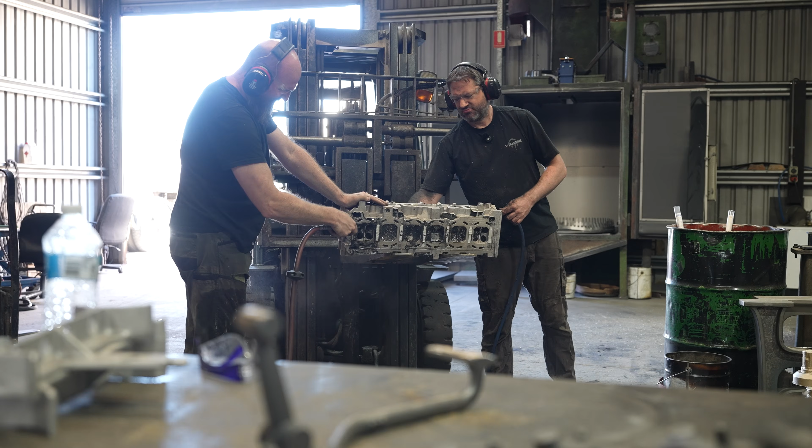All right, I'm standing here with Adam from Hasco Foundries, and we do all of our casting here in Australia. We're going to hear a little bit about the foundry, and then we're going to talk about our RB blocks and heads that all get done here. Thank you, Adam, and I'll let you tell us a little bit about why you do this insane, hot, sweltering business.

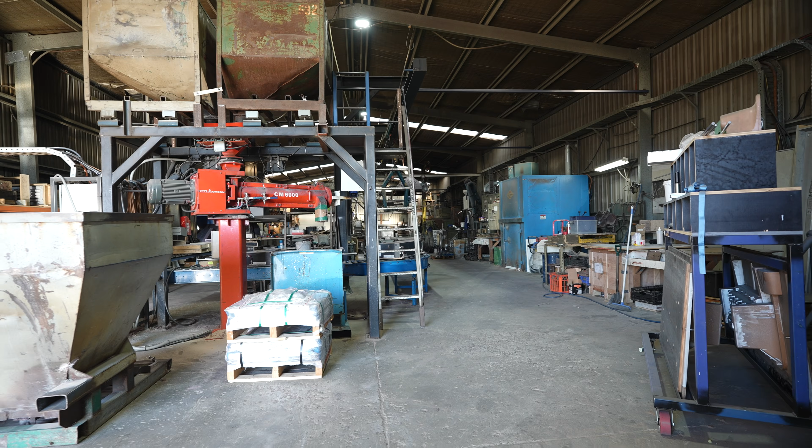We're Hasco Foundry. We're a small family business. We've been operating since the mid-80s. It started out as a small backyard operation before we migrated to this shed. We do ferrous casting and non-ferrous casting, so we can do both cast iron and aluminium castings for the performance auto industry, amongst various other industries that we serve as well.

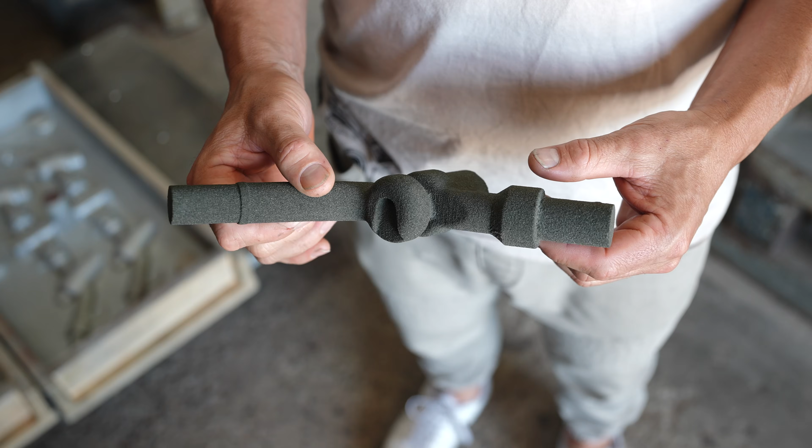I've seen some brasses and... Brasses and bronzes. We do rail, aero, transport, performance auto, mining, fuel nozzles. Fuel nozzles, yeah. Being a low volume jobbing foundry, we do pretty much whatever people bring in, we'll have a crack at. Because all the volume stuff's gone overseas, so you've got to do the small, niche, high quality stuff.

I've seen some 202 cylinder heads. Yes, yep, we do a 202 red motor cylinder head. The V12 LS we do as well.

And then we thought we'd ruin your life with an RB. No, we love it. What are you talking about?

So what we're going to do now is go through the whole process step by step, and I guess we start at the beginning. Yep, we'll start looking at 3D printed cores and go from there.

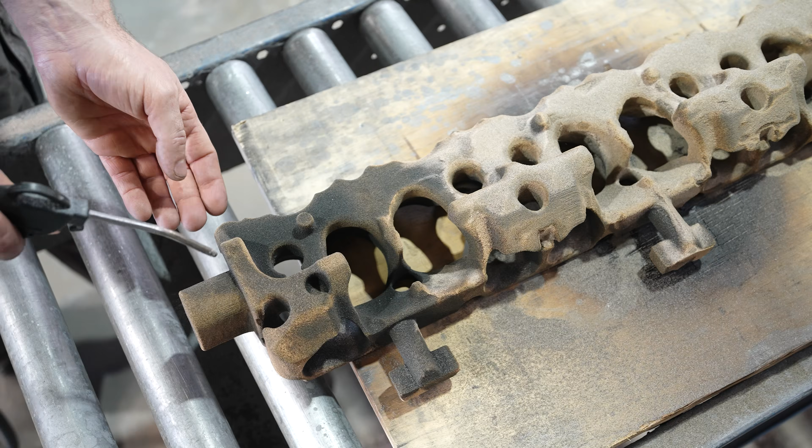So now after we've got our 3D printed core, this is all pre-production type stuff. We're not going to talk about full production stuff because we've got a lot of IP, and we're also not going to show you what our core looks like because it's very tricky, technical, and we don't want to give away secrets. But we do have the 202 one that we've just been able to video. Gives you an idea of what the middle looks like.

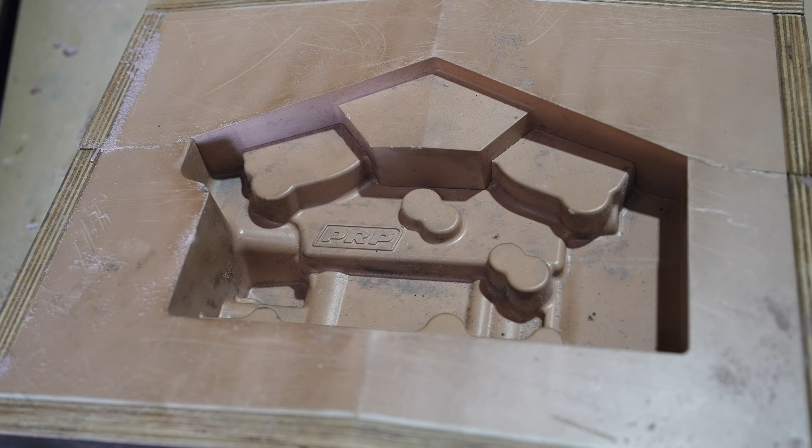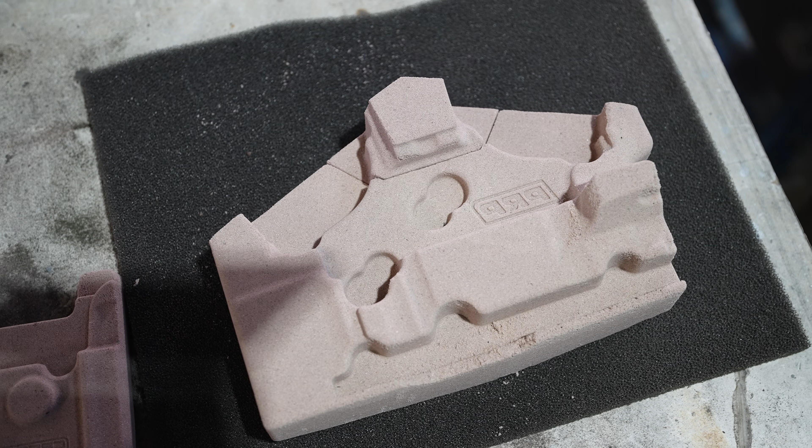So the continuous mixer is basically the way that foundry castings have always been made since we had the introduction of phenolic resins. You've got a pattern, your pattern is a frame, so you fill the frame with sand from the mixing machine. That sand then sets and becomes half of your mould. You do that for the other half of the mould, so most of the moulds that we make are going to be two-part moulds with the bottom and the top. We call the bottom the drag and the top the cope.

And then if you've got intricate geometry inside the casting, like you do with a block or a cylinder head where you've got jackets, oil galleries and whatnot, ports, the best process to do that is to 3D print the cores as we've talked about. Then you drop the core into the bottom half of the mould and then close it on top.

So once we've got the two halves of the mould together with the cores inside, it's ready for pouring. So we move it down the line to the furnace area, melt and prepare the metal, and then pour the castings. Let's have a look, can't wait.

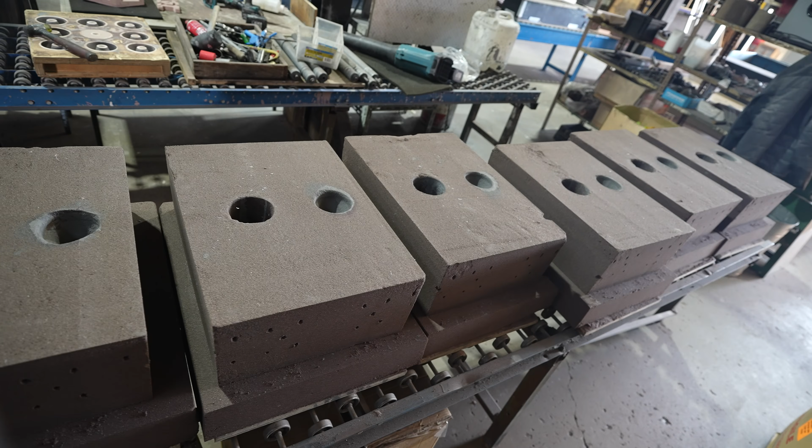So behind me here, we've got the patterns that we've filled up with sand from the continuous mixer. The patterns form the bottom half and the top half of the mould when they're filled with sand. So once it's filled, it's got a certain amount of time for the sand to set. In our case, we've got it set to about 10-15 minutes.

Then you roll the mould over, strip the pattern off. Pattern goes back to the continuous mixer to get filled again for the next one. And then the moulds get assembled further down the line before we pour them.

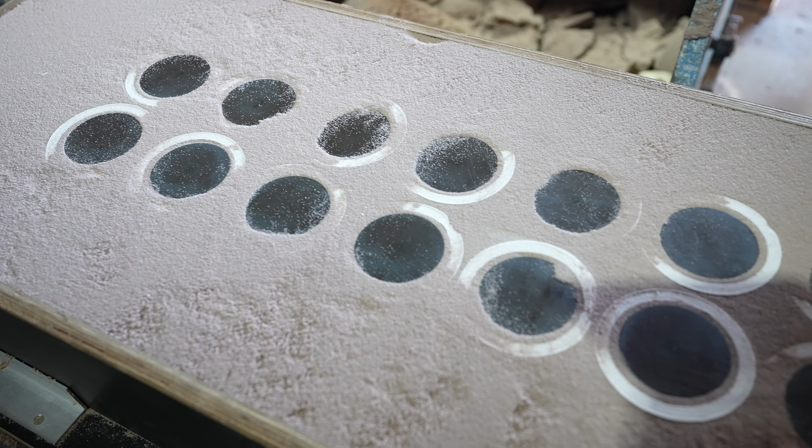Explain to me the filling tubes. At the top you can see those ceramic... So we've got an insulating sleeve there, and the idea behind the insulating sleeve is that as you've got a molten casting inside the mould solidifying, it's expanded in the molten state, and as the metal solidifies it contracts, and as it's contracting we need a hot reservoir of metal above to feed down into the holes that are forming underneath.

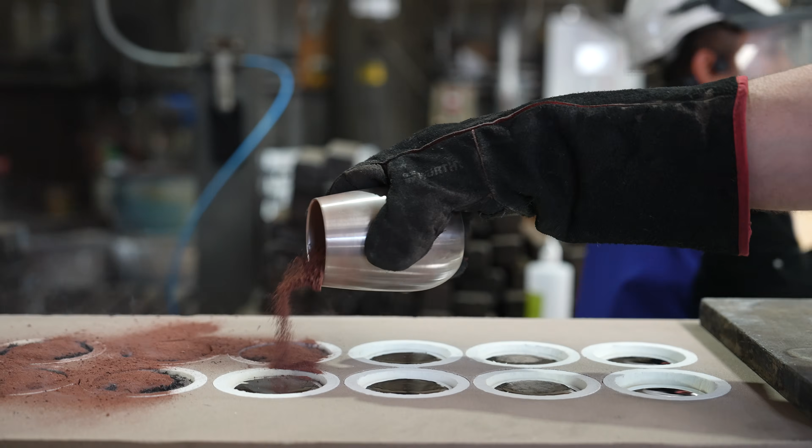So you want that metal in the sleeves to solidify last, which is why they're insulated sleeves, to keep the metal nice and hot. And we also have an oxide that comes up through it. We've got a product called Ferrux, which is like a topping. So we pour that on and that sets fire. It's an exothermic reaction. That keeps the sleeve hot for longer as well. Keeps the heat in.

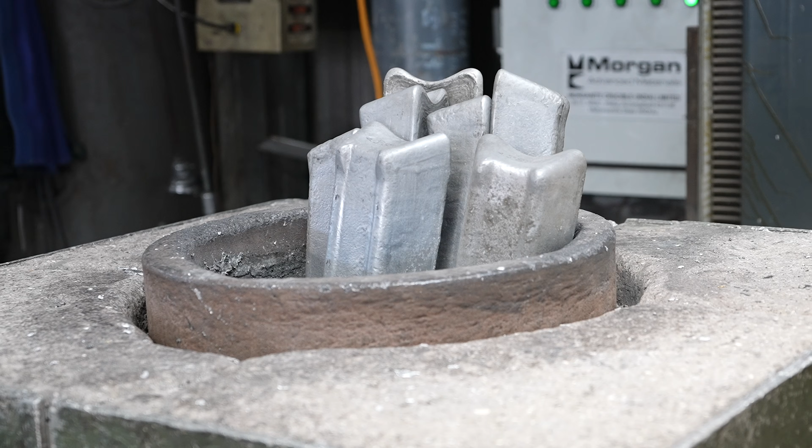This bit was really interesting to me because I thought you heated the metal up in a molten furnace with some sort of coals or fire or something, right? That's what you see on TV, but this is actually induction. It is. And it uses, I'm going to let you take over. Okay.

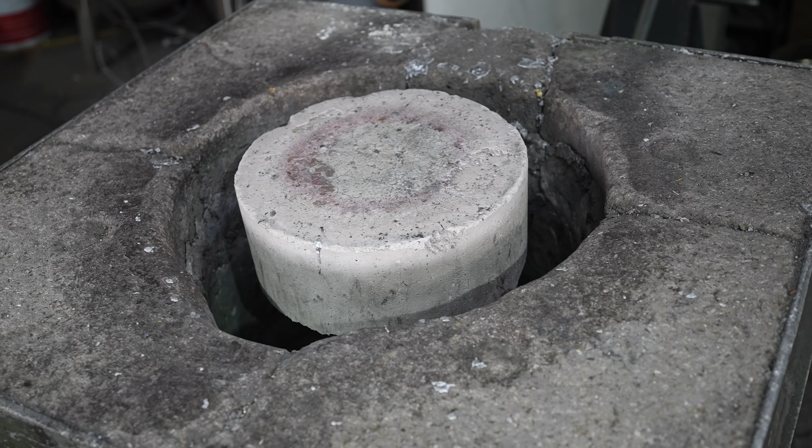So we melt with induction, and the way induction works is we've got this power pack here. That power pack powers this furnace. So this is our non-ferrous furnace where we do all of our non-ferrous casting, so your aluminiums, your bronzes and brasses. And the way it works is it's got a copper coil that's around the furnace there, and that power pack generates a really large magnetic field in that copper coil, and that magnetic field generates eddy currents in the metal. And those eddy currents are what cause the metal to heat up and melt it. So it's much more efficient than a resistor-based furnace, which is like a glorified toaster.

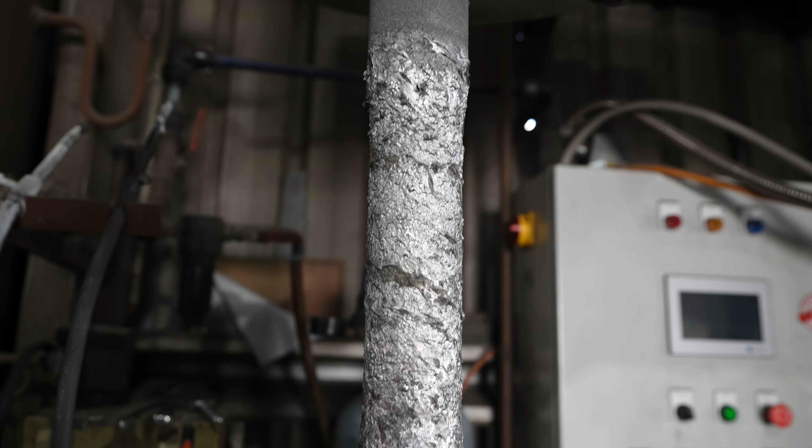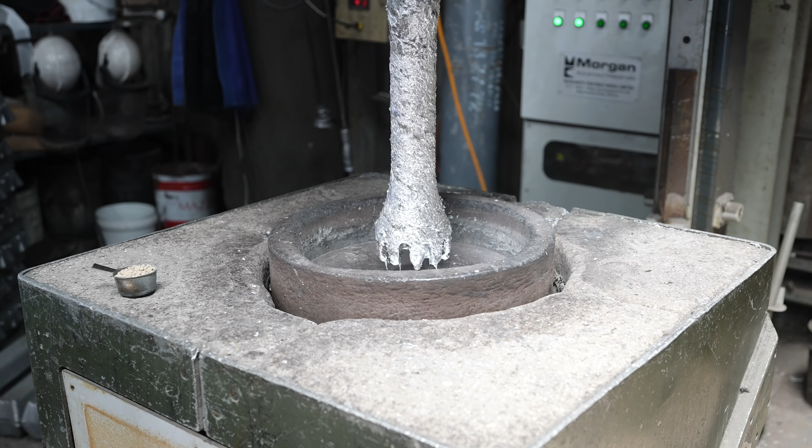I want to talk a little bit about this machine because this is one of the reasons why we prefer to work with you specifically at Hasco and are leading the game with Australian manufacturing on a global level. So the way we treat our metal, or aluminium in particular, is we degas the metal, and the way we do that is by pumping nitrogen through the metal. And the reason we do that is it removes impurities, it removes oxide films that form as part of the molten metal process, and it also removes hydrogen, which is absorbed from the atmosphere.

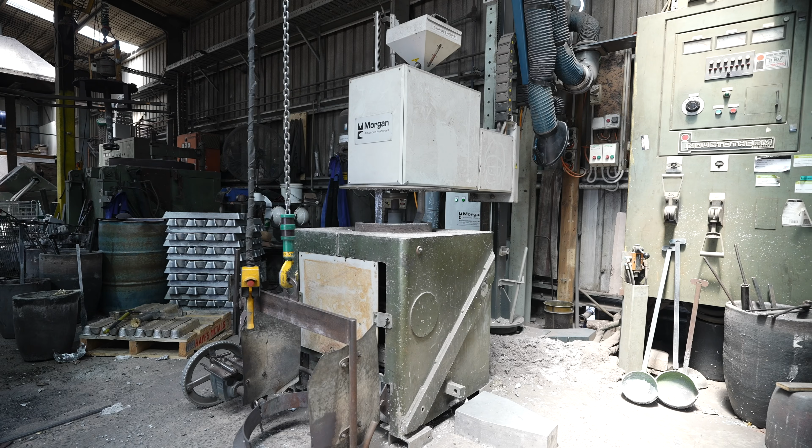And the way it works is this machine here has got a head on it, and it goes down into the bath, spins, generates a vortex, which does two jobs. It pulls the cleaning flux in and stirs it in, and then it'll slow down in RPM so that the bath sits nice and flat and the degassing process starts. So the gas that's being pumped through the rotor head is being split up into lots of small bubbles by the shape of the rotor, because there's teeth on the bottom of the rotor. And then those bubbles permeate through the melt. We do it for about 10 minutes, at 8 litres a minute, and that cleans out the oxide films from the bath.

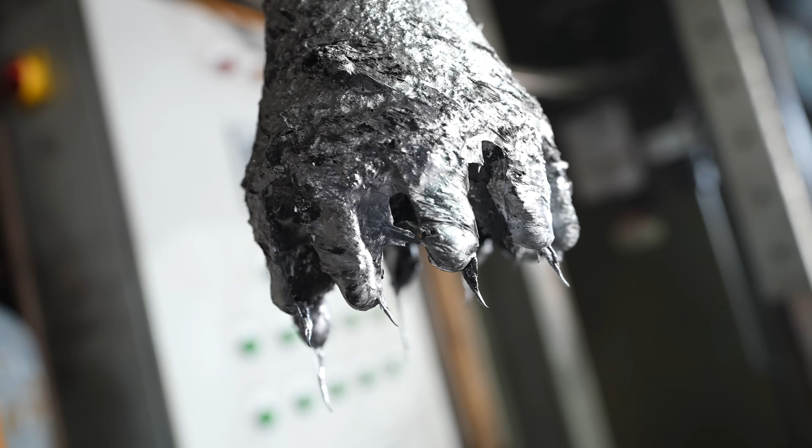So oxide films form on molten aluminium almost immediately. So when you see aluminium in the molten state, you've got this film on top, which is like a dry ceramic. And if you've got turbulent metal and it folds over on itself, you get a dry side to dry side, and you get a trapped entrained pocket of air in there. Yep. And then the head pressure of the metal after you pour it holds that shut. But once it starts to solidify, it's free to open because that head pressure's not there. So you've got to get those films out, and the best way to do it is with nitrogen degassing on a system like this. You get porosity and cracks. Exactly. You're basically pouring porosity and cracks into the casting if you don't clean out the oxide films first.

And the reason why we like this machine so much is because it's fully automated. So you get the flow rate the same every time, you get the degassing the same every time. It's got a silicon carbide rotor that doesn't deform and change shape over time, so you get consistent quality that way as well. And it just removes the human element. You just hit the go button and let it do its degassing cleaning cycle, and then you know that the metal's ready to go. I didn't realise it, but the amount of time, how fast it spins, the amount of teeth, the amount of air, everything is crucial. Everything is considered to the second. Yes. So it makes a difference. So you've got to have it repeatable, and the best way to do that is with a PLC controlled machine, which is what we do.

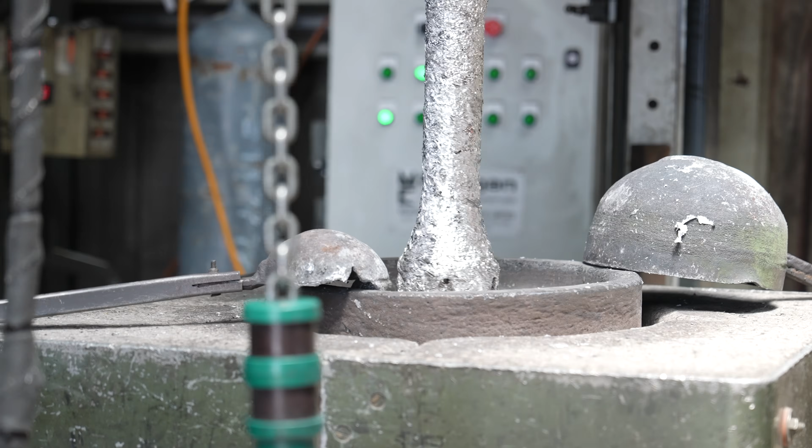Once we've got the metal nice and hot, I see you heat it up again after the nitrogen process has stopped. Yep, so we degas it. We'll lose a bit of temperature as a result of pumping the cold gas into the metal. So we just give it a quick nip to bring the temperature back up to the pouring temperature, and the pouring temperature varies depending on what we're making.

700-800 degrees, something like that? In this case, about 720, 730. And once you've got the metal to temperature, you just skim the top, get it in the ladle here, or in the removable crucible in this case, take it round and pour your molds.

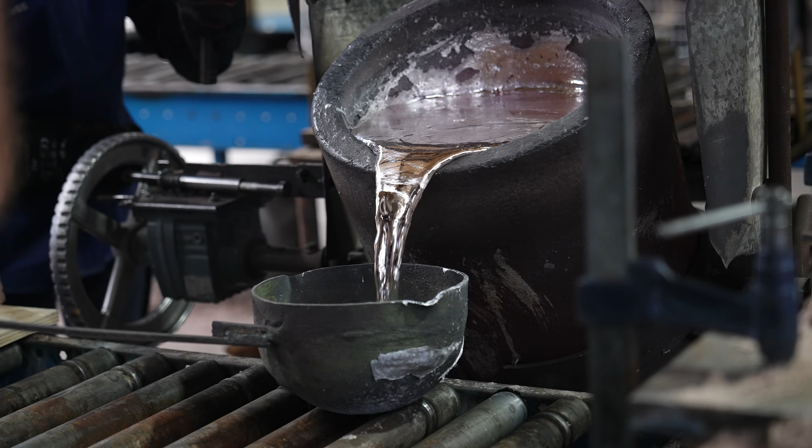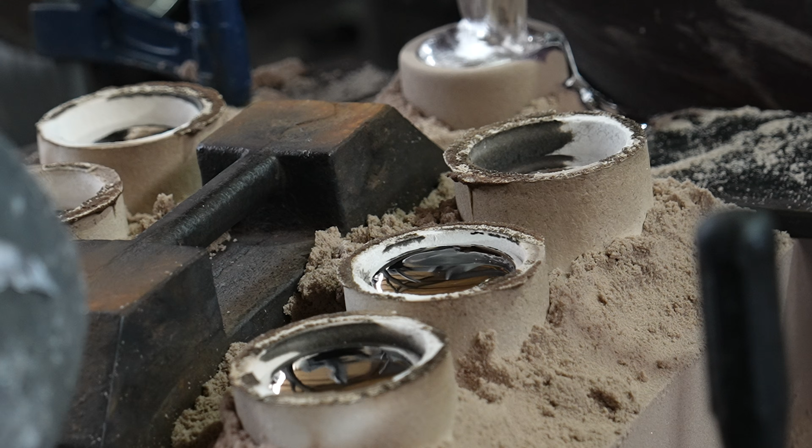So you've seen all the sections of how a cylinder head in this scenario gets cast, but you're about to see the whole process from start to finish of an RB30 cylinder head getting made. We're going to show you the actual whole process in one go and see how it turned out.

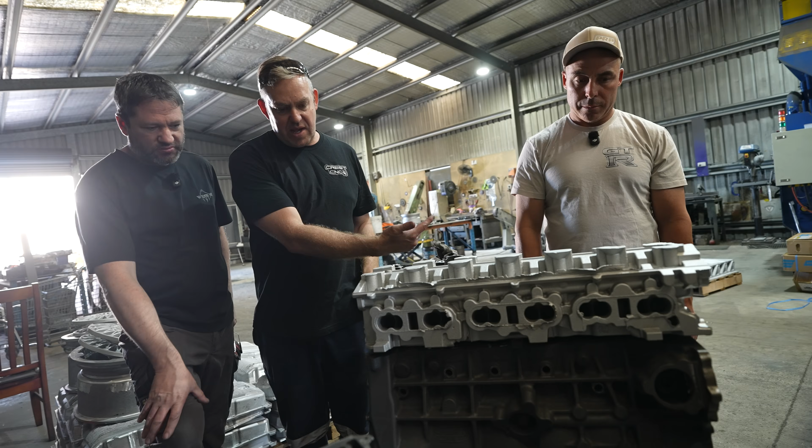Thanks for the head. It's my pleasure.

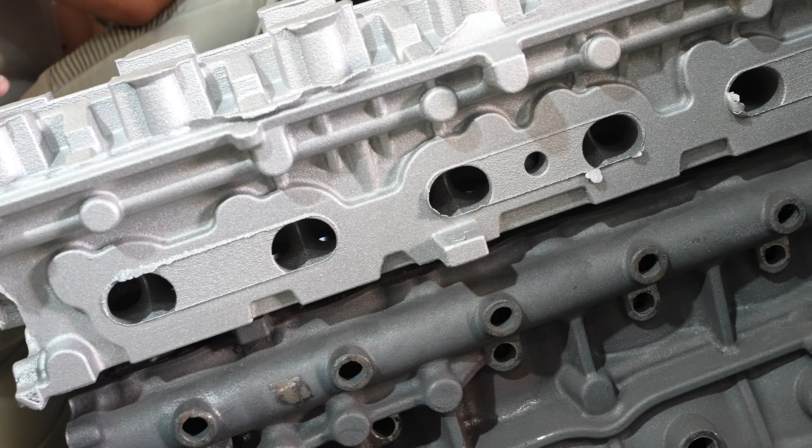We've got a head. It looks great. We've had it shot peened, cleaned a lot of the sand out of it. Yep. It still needs to go to treatment. We still need to pressure test it, QC it. There's a couple more to go, which you guys are going to pour tomorrow, and we'll have a nice batch that we can go and process.

So that, from beginning to end, is how we make a cylinder head casting. And in a later video, we're going to show you how we machine it, prep it, and do the rest of it. But while we're here, you might have noticed a big dirty pile of blocks. We've got one here that we've cut up.

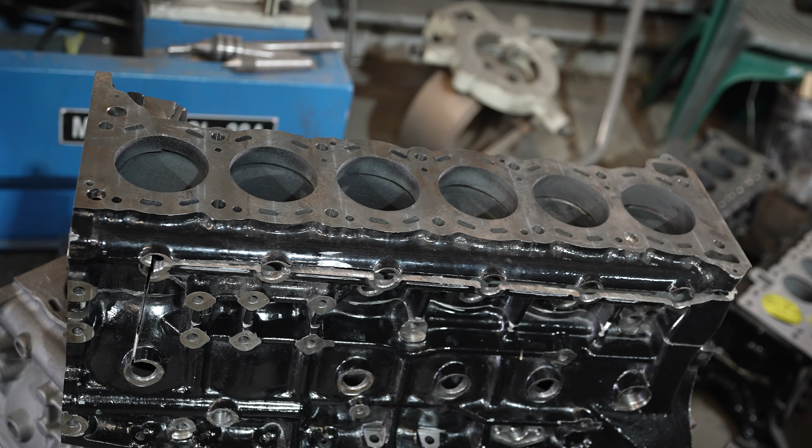People ask us all the time, is it different to an OEM one? And no, we just made it exactly the same, because why would we make it any different? Of course we made it different. So let me talk you a little bit through what we've done.

Every 10th or so block, especially while we're getting it off the ground, we cut it up, check it out, make sure we've got consistency, we've got a conformity of production, and we like to make sure that everything that comes out of the factory is exactly what we intended it to be.

Because we put a lot of smarts into this block, we're watching it all very closely, not just from a manufacturing point of view, but from a passionate point of view, because Chris from Crest has done all of the work behind the scenes with Hasco to get it poured, making the molds and getting everything sorted out. We've been working basically for years on the design. There's a lot of IP that we've put into this block that looks very different to the standard one once you cut it all open.

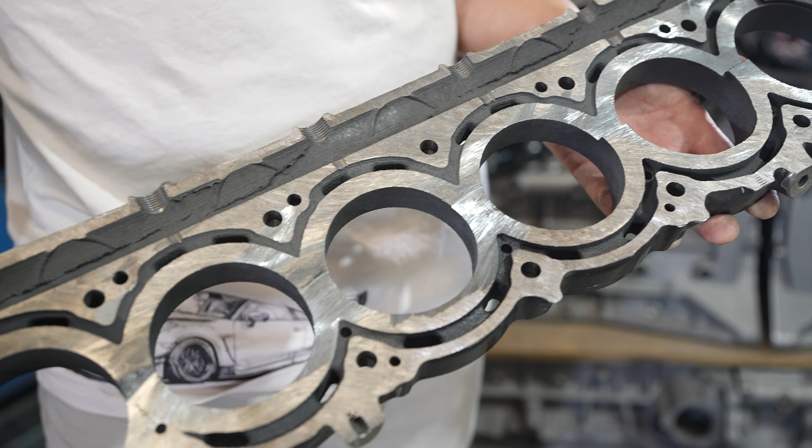So I'm going to show you a little bit about that, but here is a deck. You can see the deck thickness, which is only 5 millimeters on an RB30 for argument's sake. This one is about 20 millimeters. Now we skim a lot off the top of that, but you can see the inherent detail and strength in that whole deck, which is where all of the RBs crack. You also have the crack above the oil gallery here, which is also now reinforced.

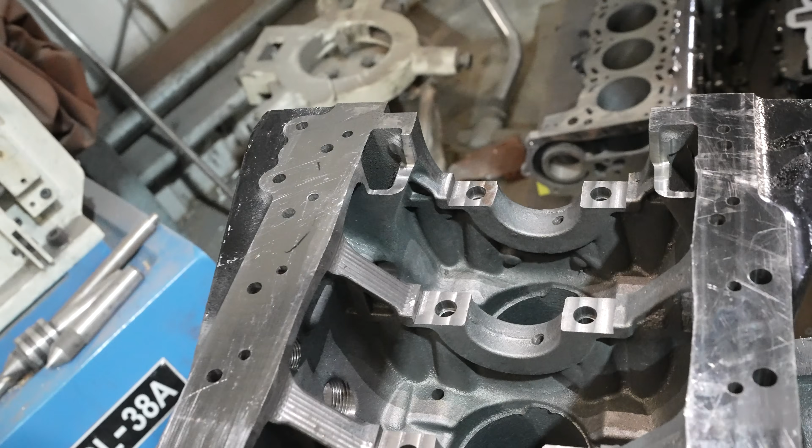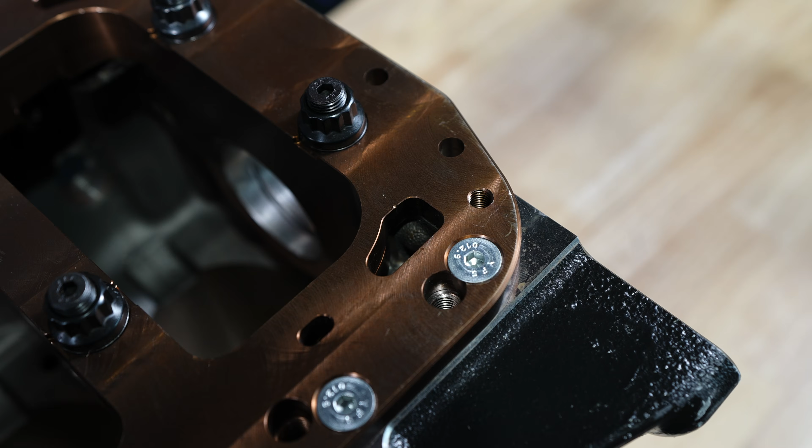On that note, I just wanted to expand a little bit on some of those key benefits that we've created on this particular block, starting with the oil drain backs at the back of the cylinder head. They all go through in a standard gasket formation, but we've actually opened up the cavities that go towards the crankcase and below the center line of the crank, which is a huge improvement over the OEM, as all of that happens well and truly above the crank line, and there's a lot of fluctuations with air pressure that keep the oil up there. So we've managed to get it out all the way through the brace, and you can see here underneath there's actually holes through the brace that allow that oil to get out.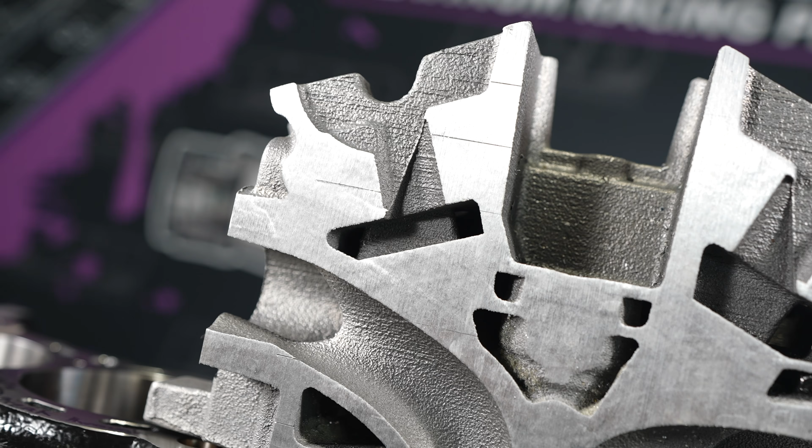We all know that the head drain is crucial on an RB to get the oil out of the cylinder head and down into the crankcase. We wanted to incorporate the head drain so you don't have to bolt it onto the back. Sure, we want to sell you a head drain, but you don't actually need it as long as you use our cylinder head with a block. I'm going to show you why. There's big oil galleries here that go through from the front to the back.

You want oil circulating through the head because it cools the valve train. Springs, retainers, valves, all that stuff. You want to keep it cool, and the oil dissipates the heat and gets it out of the cylinder head.

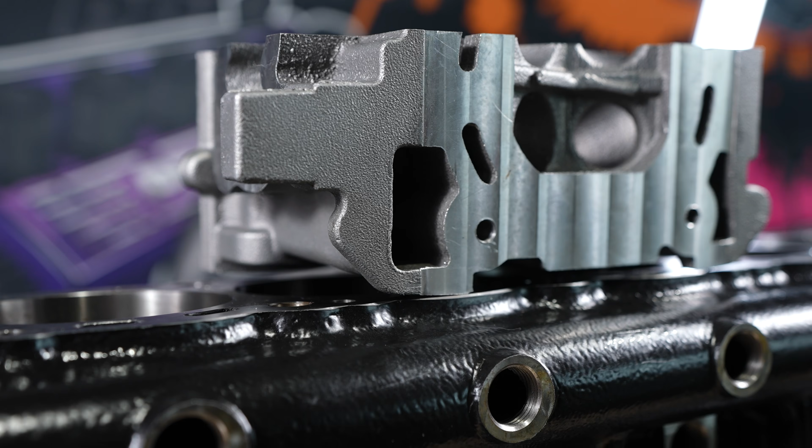They all join onto the big oil galleries and drain backs through the head, as much as the gasket will allow, but then they really open up, as I mentioned before, through the crankcase and down below the brace. So all of that is made to work in conjunction with each other for the best possible result. Knowing that the RB has had oil flow issues in the past, we wanted to alleviate them so you simply don't have to think about it anymore.

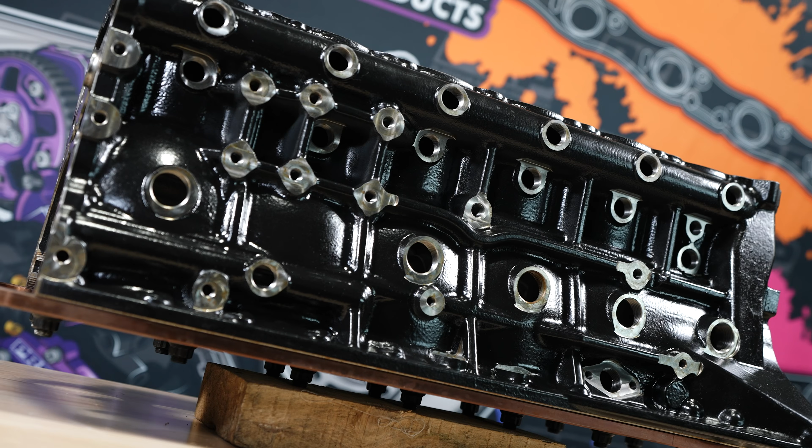To list some other key changes we've made to the block, we've got bosses everywhere. You can do your oil drains, if you do want to run a head drain, turbo drains, and we wanted to put them everywhere so you're not limited to having to run pipes all the way down the side of your crankcase. We've made other changes like removing Welsh plugs from the front and the back of the block.

You always have to remove a water pump, timing gear, all the covers that go on the front, or for the back one, you have to remove a gearbox. So we wanted to avoid all of that because we could. But the best part about our Welsh plugs, or freeze plugs, is that they're threaded. Very easy to remove, they seal with an O-ring, and as an added bonus, we're gonna let you have any color you want as long as it's purple.

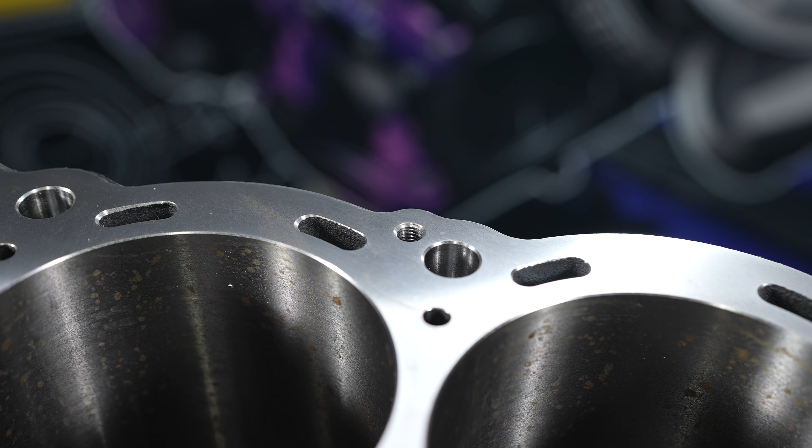What we've also done is the oil gallery restrictor to the head. Obviously we're going to be running a bigger one now because we can move more oil through the head, and our oil pressure systems have become obviously far superior, moving a lot more volume. We can get it out of the head so we can put more in the head to begin with. We've created a special M7 threaded oil gallery restrictor that is now very easily removable.

It's got a screwdriver slot in the top which allows you not only to remove it, but if it does want to come loose, it allows oil to escape the top and you're not seizing your cylinder head because of lack of oil. We've also created an RB25 inspired bottom with smaller holes that stop debris getting stuck and stopping flow through the gallery restrictor.

It's our own design, it's modified, it's had some years of experience put behind it, and I'd love to be able to offer it to anyone. So you can. We made it M7 so that you can tap your block and stick one of these bad boys in, or two in this case.

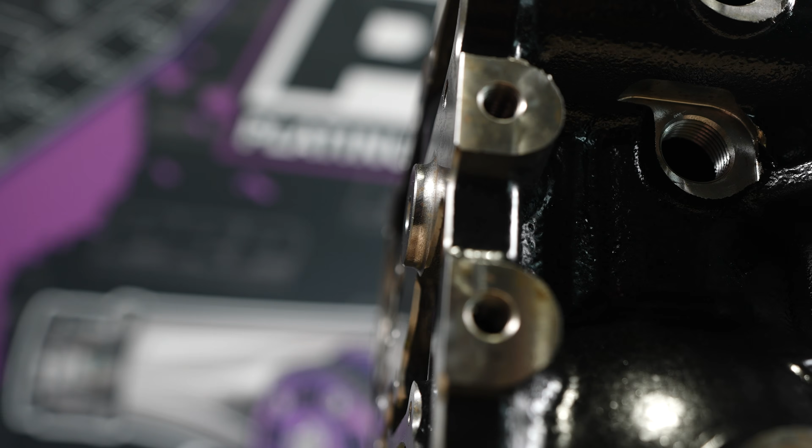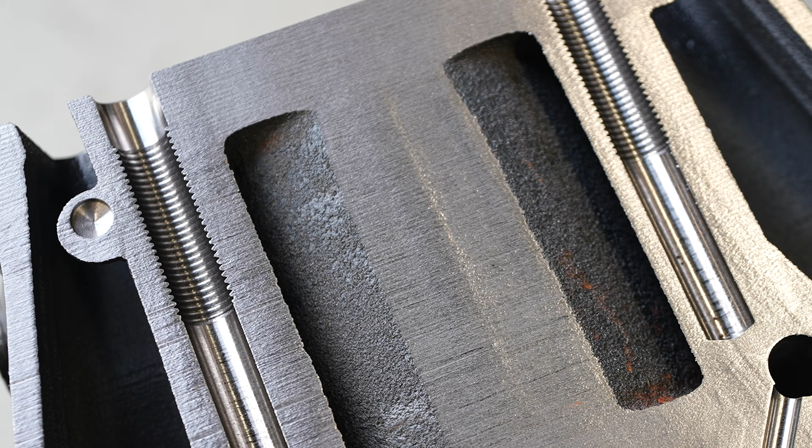Moving over to the front of the block, a clever little thing that we've done is you can see the timing belt tensioner post. We've moved that out so that you can have a clear run for that bolt boss, which is the head stud material that goes all the way down to the main stud. So we wanted a clear run at that because we don't know how long we're going to run that head stud down. We wanted the freedom to be able to run a really long, dirty, fat head stud, and we can go up to a 9/16 with this bolt, and this can be modified later. So we wanted to put the smarts in early just so we were ready.

If you've ever watched our block cleaning video, getting to the main oil gallery is imperative. So we've put in a removable bung front and back to make it really easy to clean out your main oil gallery. I can't stress enough how important it is to clean a new block. Even with a new block, you should be doing that a couple of times. You can never have it too clean, so please go out of your way to clean the crap out of it, and you're still gonna find stuff in your oil filter to demonstrate how much of a crappy job you did, whether it's a new engine or a rebuilt engine, so please take your time and clean the fuck out of it.

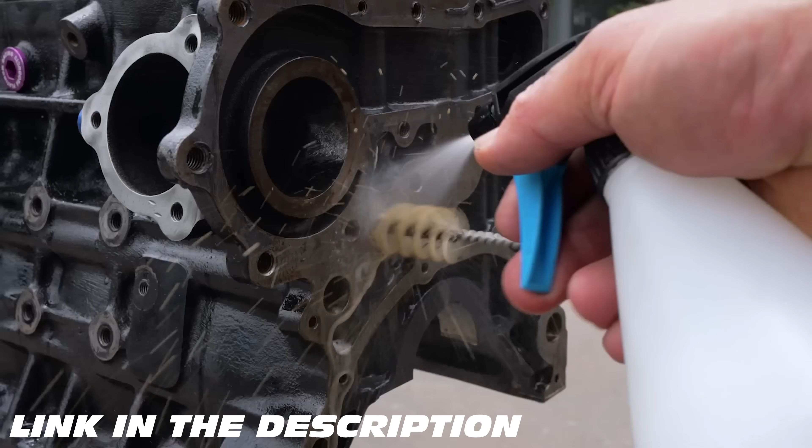If you don't know how important it is to have access to your main oil galleries for cleaning, please go and find the video that we did on how to clean an RB block and head and get real familiar with how to do it properly, and then do it 2 or 3 times in a row, but please go and watch the video, it'll really help.

If you're making your own block, you want to make sure that you've covered every potential that anyone's ever going to want. So there's 2 main oil galleries in it. There's an oil gallery pickup that goes all the way to the oil pump. Yes, you can get an oil gallery feed into the side of the oil pump, but we decided to put one right here in the middle of that main oil gallery, just in case you wanted to bypass the standard

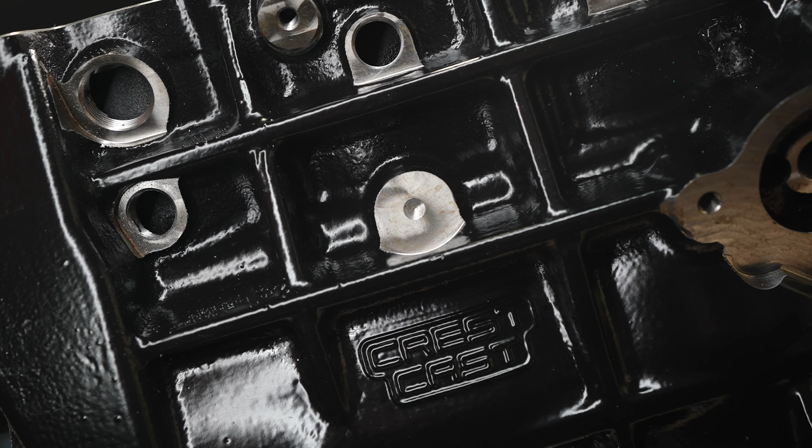oil pickup. We've also got a feed port here on your high pressure line. You can drill, tap that, stick in a fitting, and you can get main oil gallery pressure from that or feed it into the side of the block. We haven't come across needing that, but it's there just in case.

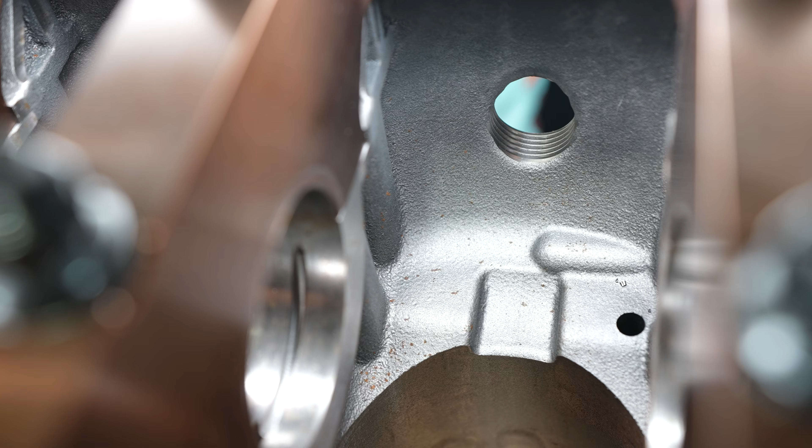Looking at the bottom of the block, we've made a few changes as well. So the oil gallery drain backs come through the brace. We've got the provision for a 4-stud main already cast into the block. So we can deck the main cap registers, put in extra bolts. There's a little ledge there that goes the whole way over, and you wouldn't notice it unless I was telling you about it. We've got a huge clearance for the conrod to swing around inside the block as well as the brace, so you don't have to do any clearancing when you're trying to swing a big stroked engine.

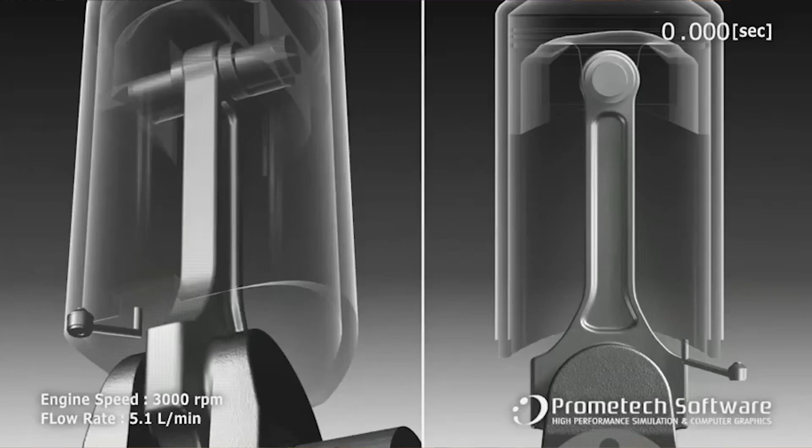What you may also notice, piston squirters. Personally, I love them and I'd put them in everything. We've got a provision for a second squirter there, which we may or may not use, but if you notice the new G16 Yaris engine, which is an amazing feat of engineering, has got 2 per bore. So we haven't played around with 2 yet, but we've got the provision there, and I'd love to play around with it in the future. At least it's ready for us when we do get there. Now that you're all caught up on the block, let's head back to the foundry and wrap things up there.

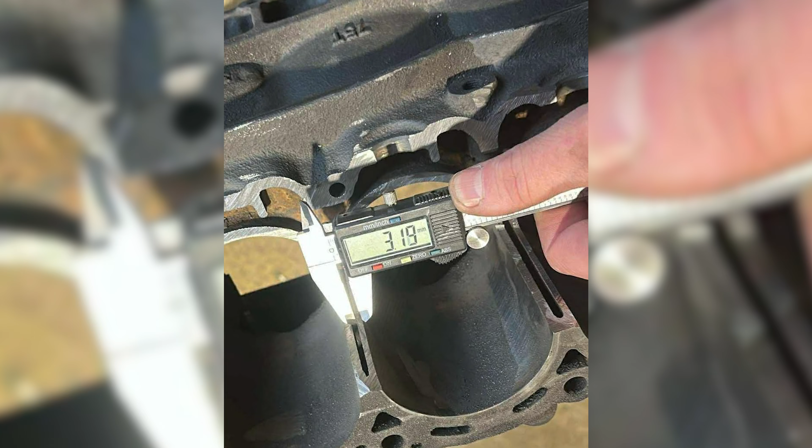Now, let's have a look at the bores. The bores in a factory block, somewhere between 2.5 millimeters and 3 millimeters as a worst case scenario. You can see the thickness of this is a consistent, after machining, 8 to 9 millimeters. So we have completely nailed it when it comes to manufacturing to get a consistent bore the whole way around, including joining onto a very thick deck, and the bores are consistent the whole way down to the bottom.

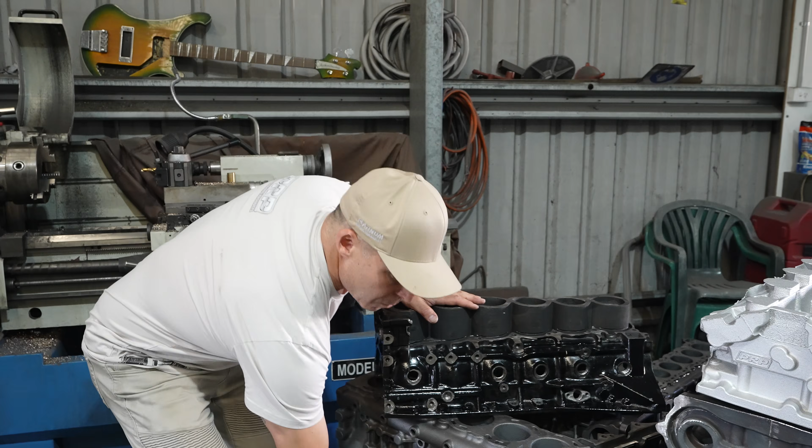We also have a lot of smarts in where the bolt bosses go through from the top of the deck all the way into the bottom of the mains. In the RB26, it shies away about 2 inches down the bore. It's basically missing after that. We've given it a whole heap of strength when it comes to pulling on head studs. The deck isn't going to move at all.

Obviously, it's very consistent, very thick, so we shouldn't have cylinder heads lifting as much because you can put more clamp load on the bolts, and that's a specific that we're going to get into later. They should be able to take a lot more cylinder pressure. The bores are very thick, consistent. They're not going to balloon. You're not going to have any of those issues.

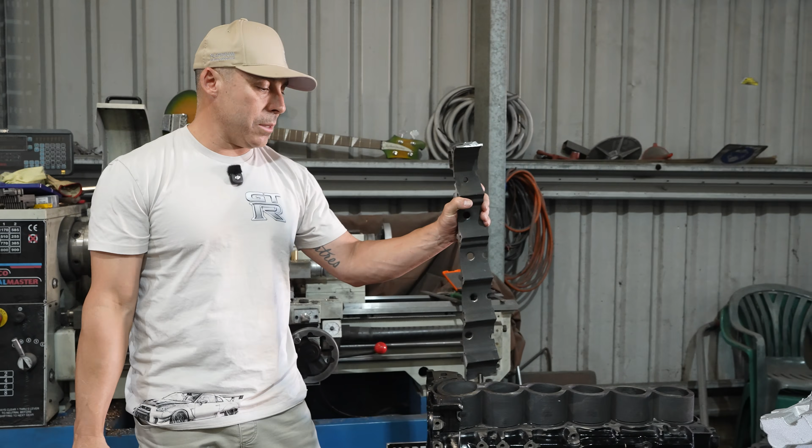But what's really important about this block, other than all the options that we'll get into down the track, is we have not made it out of grey cast iron. We believe this is probably one of the first blocks that's been made out of a ductile iron, which is something that we started experimenting with years ago with our integrated main cap brace. And instead of using a grey cast, which in comparison is extremely easy to cast, we went for the harder option of a ductile cast iron, which for a block application has made it incredibly strong. Twice the strength, for argument's sake, just to give you a number.

It's also got some copper mix, which helps with lubrication of piston rings, and we've got a whole heap of smarts within the metallurgy of this material for many certain reasons. It's the best block on the market. We made it to handle in excess of 2,000 horsepower. There will be options with 4-bolt mains. It has an option with a standard sort of overlay main brace and our integrated one, dual and 4-bolt options. We're going to get into head gaskets, we're going to get into sealing, and we're still in the process of rolling all of these blocks out now in full production.

We're waiting for people to go and make serious numbers. So speaking of ductile cast iron, other than why we're using it, we're going to get Adam here to explain how it's cast, why it's different, why it's more difficult, and the benefits that you can give us.

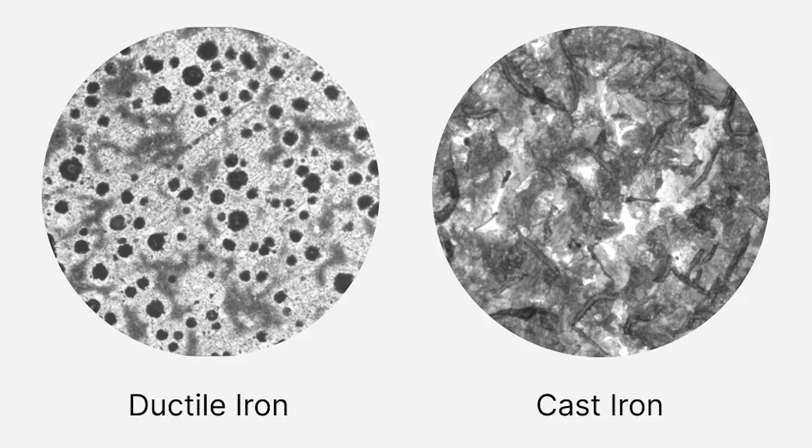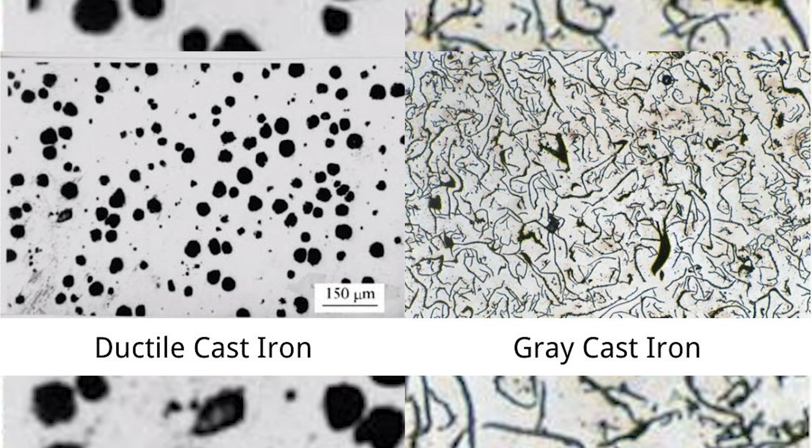Sure, so ductile iron as opposed to grey iron, the way that the carbon exists in the metal is different. So in a grey iron, the carbon exists in a flake graphite pattern, and that's why it's so brittle, because the flakes are not ductile. The way we make it is we use a treatment that converts the flakes into spheroids. It's called spheroidal graphite iron or ductile iron, and that makes the part more ductile. So we're shooting for around a 7% elongation ductility, whereas with grey flake cast iron, you get almost no ductility at all. So it's really going to minimise the chance of there being any cracking whatsoever.

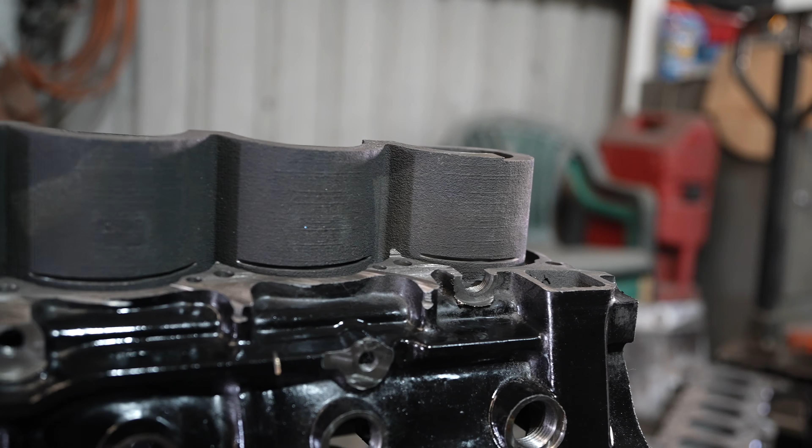The tensile strength's also about twice what you would expect with grey iron. Good for when you're bolting down into the studs. You've got a lot more tensile strength in the stud thread. It's certainly more challenging to cast. It contracts at a greater rate than grey iron does, so it's a less forgiving process. So that's a lot of the work we're doing now, is to engineer out where those problems are likely to be. So we do have access to simulations which we can run.

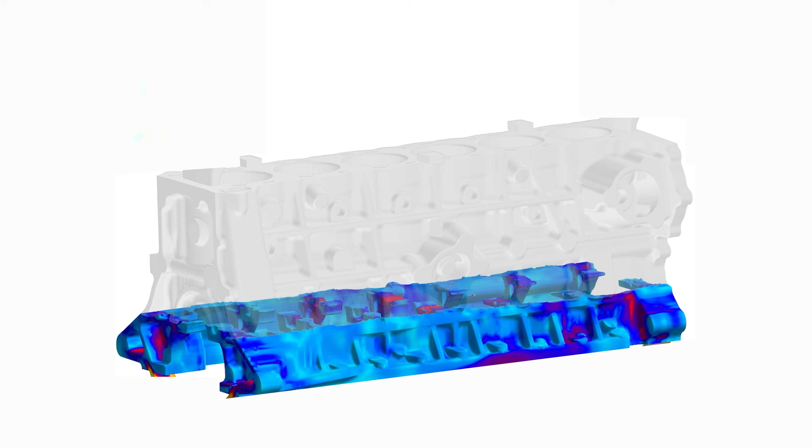So we will simulate various different conditions, various ways to gate the casting, to get metal into the casting, cooling rates, how to feed it. We can look at temperatures, we can look at porosity indicators, we can look at the flow rate through the gates. There's so many things that we can look at from the simulation that help us design the way that we get the metal into the casting, which is very important for something as complex as this.

To be honest, I had no idea how critical all of those little things are. Yep. In manufacturing, obviously machining, there is that level of technicality, and it's very fine. And people don't realise it, and when you show them, they're like, well, that makes sense. And here I just feel like I knew nothing. The minute that I started looking around and asking questions, I realised how much I didn't know. Yeah. Casting something this complicated is certainly an art, and you need to look at all of those factors to get it right. And you've shown us the simple casting, and in comparison, now I get it. Overall, it'll be a much better casting in ductile.

And with our extremely thick bore and our at least twice material quality increase, people are going to have fun trying to break it. I don't think anyone's going to break it. I don't think so either. So we don't really have a limit. Is it going to take 2,000, 3,000 horsepower? I don't know, but we're going to give it a go. But we have done everything that we can as a team to make the best possible block. And this is definitely not just about making money, because we could have made it a lot cheaper, a lot quicker, a lot earlier. This is about challenging ourselves.

And I know you mentioned before that I said, is that the most difficult head that you've ever cast? And you actually said it's the most difficult part you've ever cast. It is. There's a lot going on in there, but it's all there for a reason. And what's the second most difficult part? Yeah, that block. The block. Yep. So it's a passion project. We believe we've knocked it out of the park. We've just been cautious and hesitant to just let the floodgates go, because we don't want a single blemish on our record. We are bringing Australian manufacturing back to life.

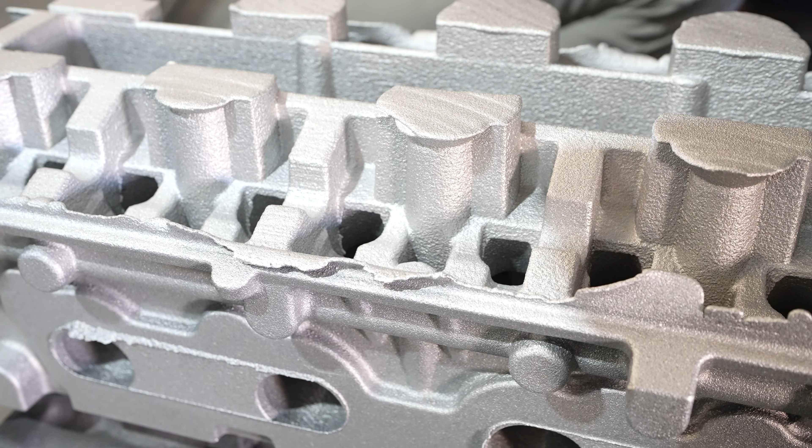We're proving a point to the world, and it's bigger than just us. We feel that we are patriotically doing the right thing for our fellow citizens, our country that we love. I'm really proud of how far we've come and what we've managed to pull off here and what we are achieving together. And this is just the beginning. So we're proving a point. We're putting Australia on the map, if it wasn't already, and proving why we are the best at what we do. So I appreciate being a partner with you.

No worries. Thank you. Many years of helping the Australian economy for years to come. Absolutely. Let's get into it. Thank you, mate. Cheers.